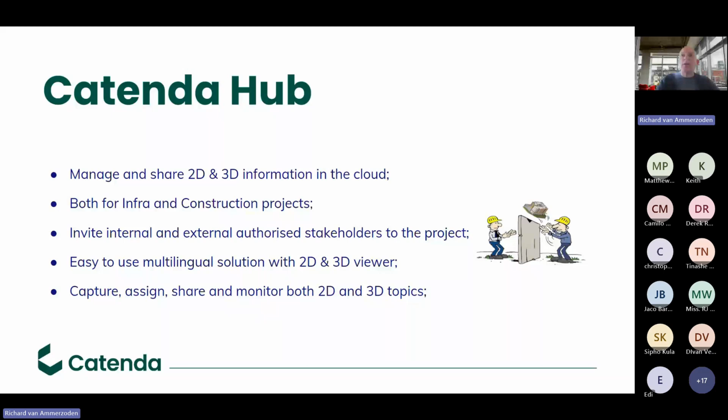And on those models and on the drawings, you can make comments. We call it topics—a change request or comment or whatever. And you can assign these topics to somebody who needs to solve this.

Catenda Hub has 4 pillars: models, but also point clouds. Imagine you need to renovate an existing building—you can make a point cloud of the building, and combine in the 3D viewer the point cloud in combination with the IFC file. We have documents and we have topics, and all these 4 pillars work together. So you can make, for example, a topic on a point cloud, or connect a document to a topic, or a topic to a model, you know?

Let's look at the BIM part of Catenda Hub. It's a powerful, but very user-friendly, 3D viewer based on IFC. In that viewer you have functions like intersecting, measuring, hiding objects, etc., and I will show it in a couple of minutes. But also your object data is available, so you can exactly see what's the material of the object, or what's the quantity of that object, etc.

Revision management—you delete nothing in Catenda Hub, but each model, each drawing will get a new revision. You will always automatically open the latest revision, but with some extra mouse clicks, you can open an older version of a document or a model. For the rest, strong topic management based on BCF, an open standard, and you can connect 2D information to the 3D object—for example, a reinforcement drawing connected to a 3D beam.

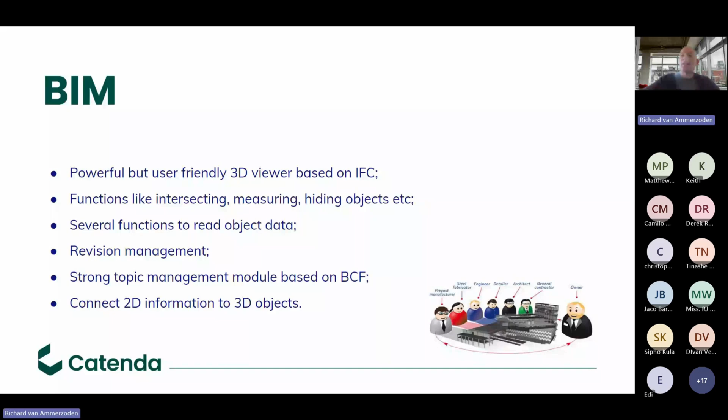Document management: authorized folder structure, so you decide who can access a folder, yes or no. There is a 2D online viewer in Catenda Hub, and it supports most of the engineering formats: standard AutoCAD, standard MicroStation, PDF, Office, DXF, etc.

There is redline functionality to make comments, and these comments can be connected to a topic, so you can assign a topic to somebody who needs to change it in AutoCAD. And of course you have extensive search and filter functions for documents. A logbook records all operations—who's uploaded the drawing, who approved the drawing, etc. And we also support the new ISO 19650 for drawings, which means you also have a workflow to approve files.

Topic management, now what I explained, it's both for 2D and 3D. If you're using Navisworks, or for example Solibri, you can synchronize the clashes automatically with Catenda Hub. But if you have a BCF file with issues, you can also import it. And you can create topics in point clouds, in models and documents. What's very important is also that you can authorize topics.

You can also give a logical name to a model, so for example architectural or construction, so that everybody sees what kind of model it is. And very easy, with one button I can now open all the aspect models of all several disciplines. It's quite a big apartment building in the south of the Netherlands. You also don't need a very strong internet connection. Sometimes I use the internet of my mobile phone to present it. It's still working smoothly also when you don't have a strong internet connection.

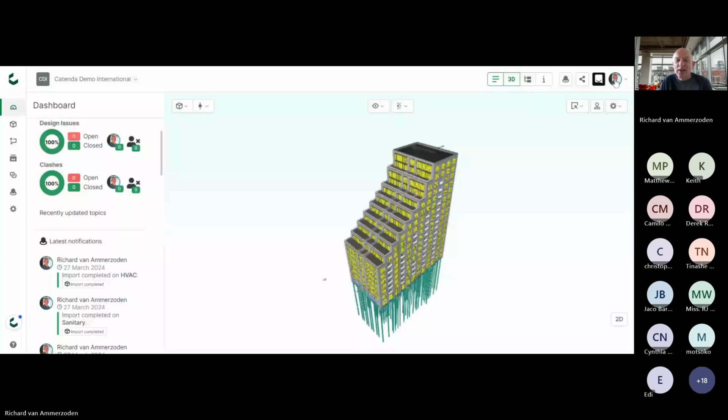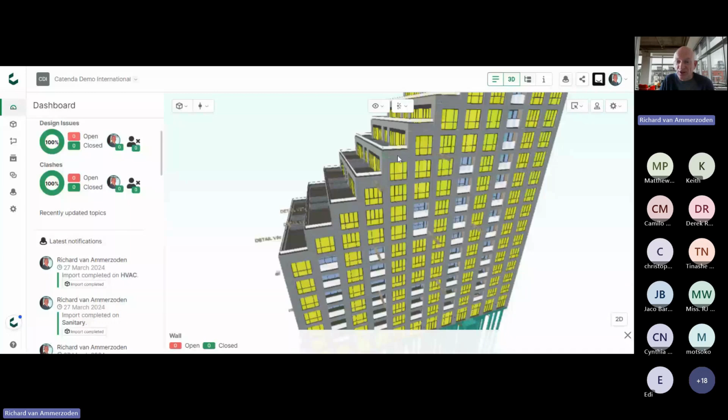Okay, here you see all the 9 models. And now you can't see it, but with the wheel of my mouse, I can zoom in, I can zoom out. I push now the left button on my mouse, and now I can turn around on the model. Very interesting is that on the right mouse button, there are a lot of functions. Here you see a lot of functions, and I can, for example, create a clipping plane.

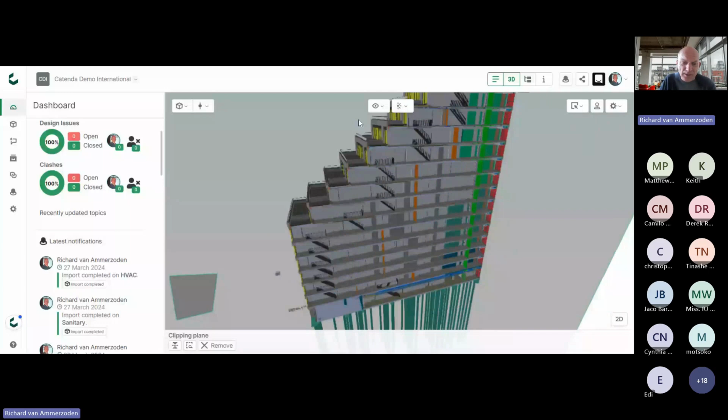And here you see, now I put my left mouse button. You see, I have a clipping plane. What I can do, here on the left side, you see the clipping plane. There is a green line around it. If I click on the green line, you see the model will freeze. And now with the mouse, you see?

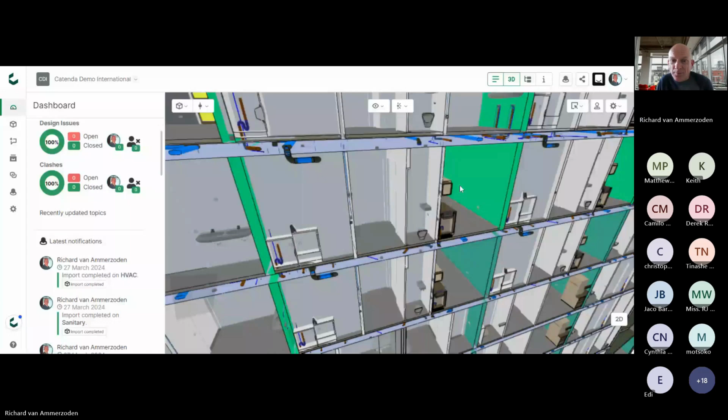I can zoom in, or I can say, for example, what's behind that wall? I say hide. So without being a BIM expert, you can very easily zoom in, zoom out, make an intersection, hide an object, etc. This model has been done in Archicad.

For example, when I click on this wall, I go to information. Here you see the Archicad quantities - the length, the area of the doors. Or I like to see, is there some material? Yes, there is also some material attached to the wall. So all the properties which you used during modeling in Archicad is still available in Catenda Hub.

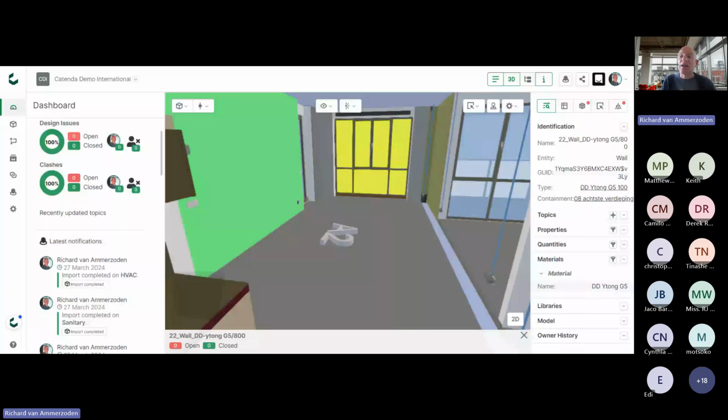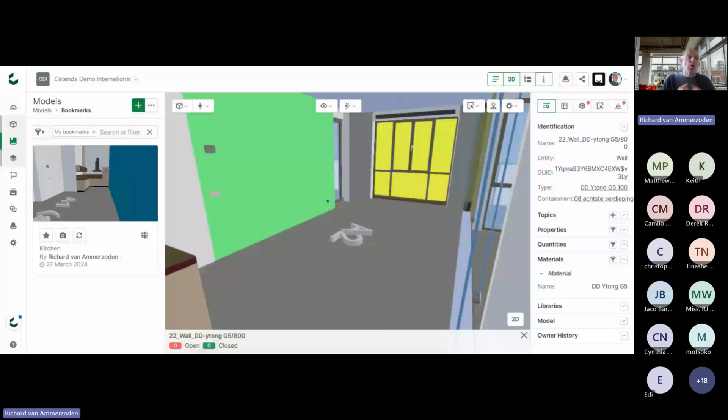What you also can do, you can also store some views of a model and use it in a later phase. We call this bookmarks. So you can create a couple of bookmarks. You can keep it for your own, or you can share it with the project. And when I click, for example, on this button, it will go automatically to this place in the building where the bookmark is.

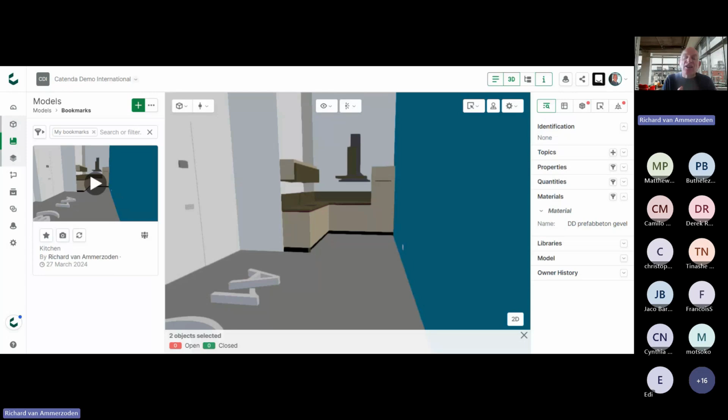This is a bit about viewing the model, getting the properties, bookmarks. The next thing I'd like to do is to create an issue, a topic. So I go to topic, and I will make a new topic. I say, for example, a kitchen.

Catenda is working with issue boards, topic boards, and a topic board is a kind of folder where you can divide your topics. At a certain moment, you have thousands of topics in your project, and with the topics board, it's much easier to find the topics. You can give the topic board your own name. I had, for example, clashes and design issues, but you can make 10, 20, several issue boards.

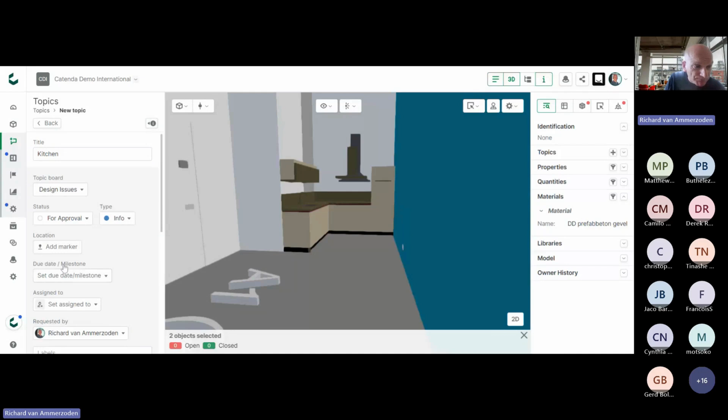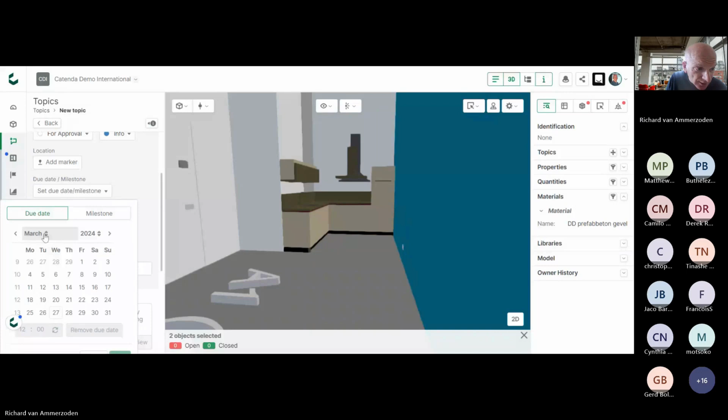You can give it a status, it's for approval. And I can say, okay, info. When does this topic need to be finished? Oh, I can say, okay, let's say the end of April.

And then you can assign the topic to somebody. You can say to the structural engineer or the person who will put the kitchen into the apartment, etc.

I can also put some extra metadata to an issue or topic so that you can find it easier back. So I said, for example, okay, this kitchen is on the 2nd floor. And then you can say, show me all the topics which are open and which are on the 2nd floor. And these labels, you can define completely by your own.

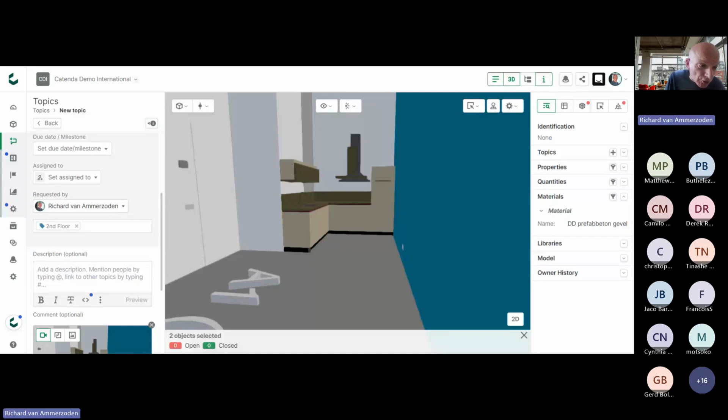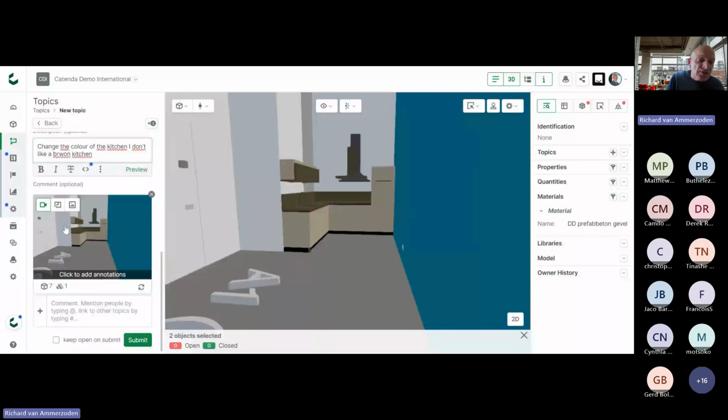And then I can say, change the color of the kitchen. I don't like a brown kitchen, whatever. Here you see it creates a snapshot of the model. And here I can redline, I can say, okay, this kitchen, and you put an arrow on it, and I say submit.

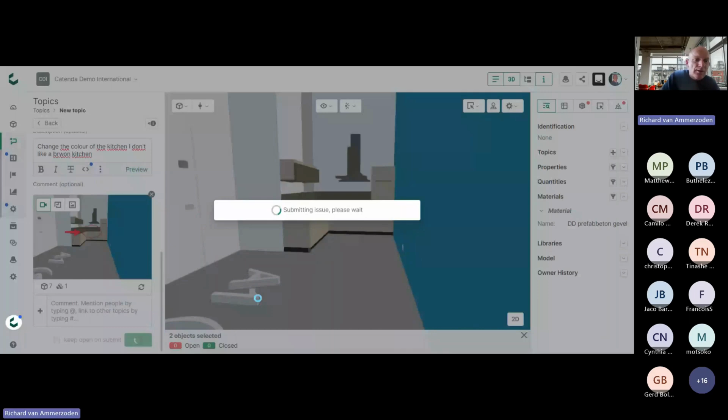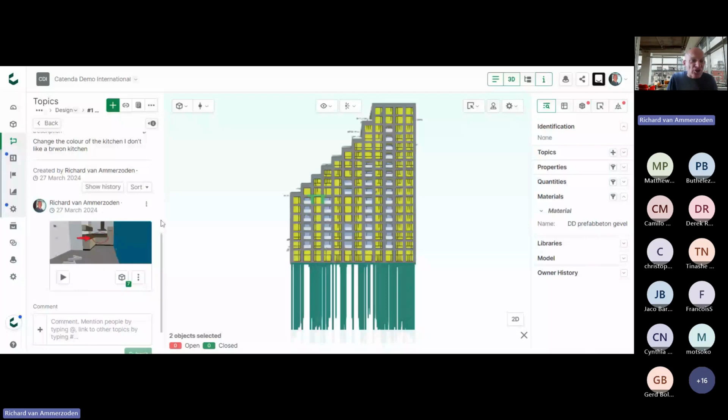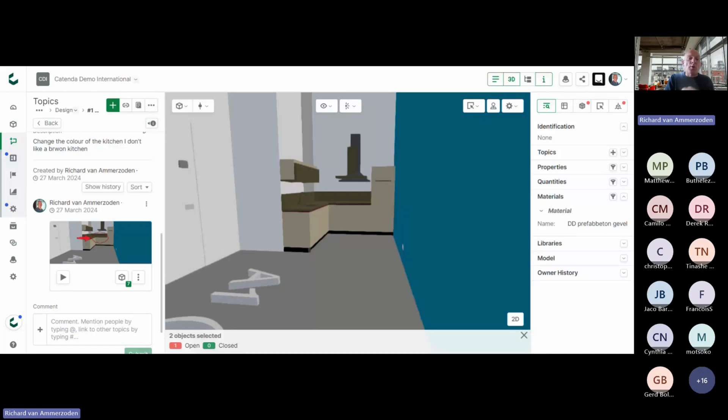Now this topic has been created. And now I need to solve this topic, and I think, okay, where in this huge building is this kitchen? Look, here is a button. I click on the button, and it knows exactly where in the model is the topic. And it doesn't matter if this topic has been created in Navisworks or Solibri or has been imported by BCF, Catenda Hub always knows the place of the topic in the 3D model.

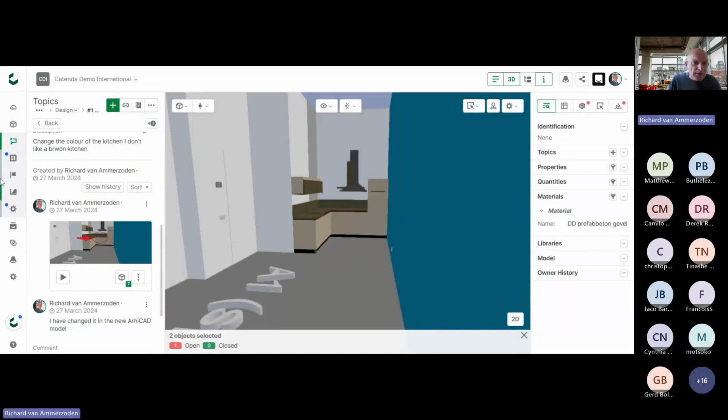And imagine I have changed the color of the kitchen in Archicad. Now I don't send an email, but I will make a comment in the topic, and I say I've changed it in the new Archicad model. Okay, you check, has it been solved? And you close the issue, the topic.

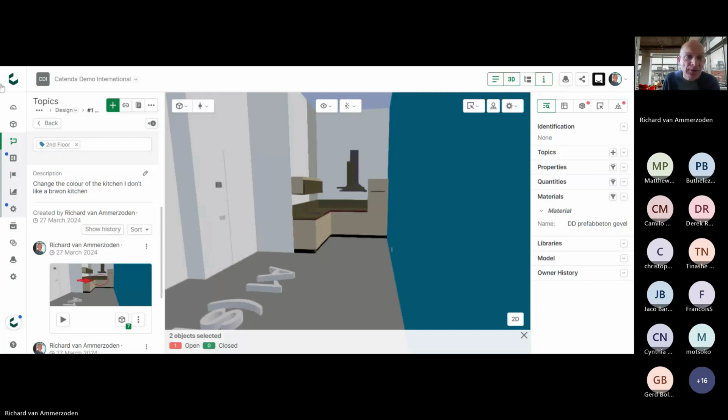So this was everything about BIM. Now I will switch over to documents. With this button I can switch off the 3D viewer, I can switch off the information, and I will go to documents.

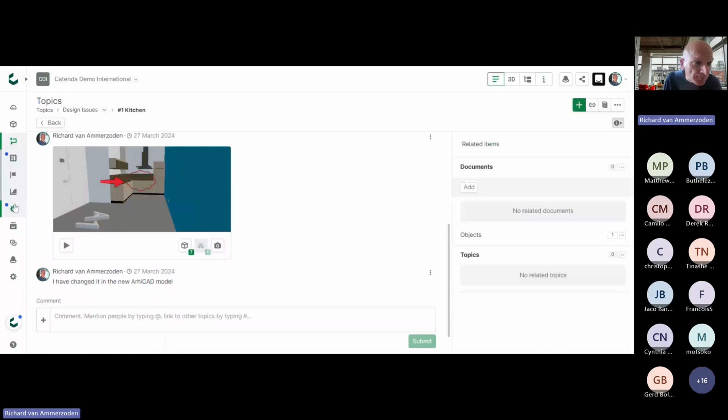I've created my own folder structure. If you have your own folder structure in your company, you can make a zip file of your folder structure. You can say upload zip, and then it will create automatically the same folder structure as in your zip file. Some folders have a color, that means there are files in that folder, and some of the folders are white, that means they are empty.

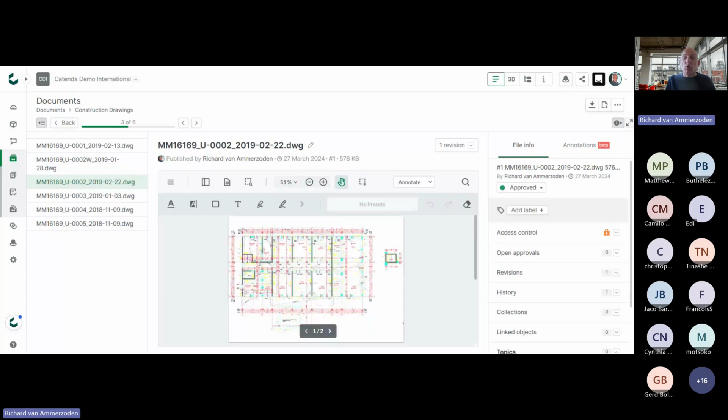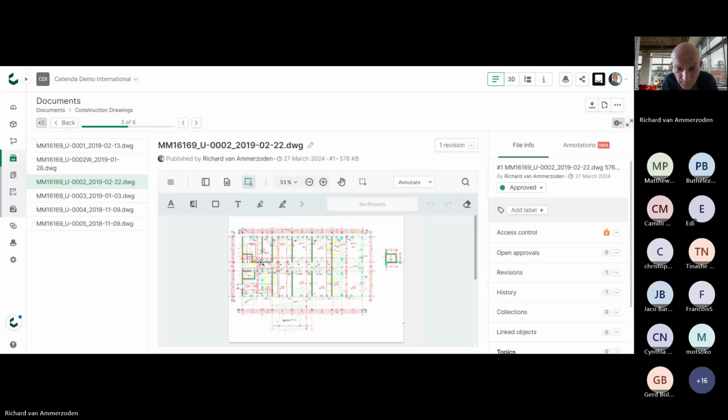For example, construction drawings. Here you see a couple of AutoCAD drawings, construction drawings, and I can click on it. And without having installed an AutoCAD viewer or whatever, it shows online the AutoCAD file. What you can do, you can zoom in, of course, and you can pan and everything used in a viewer.

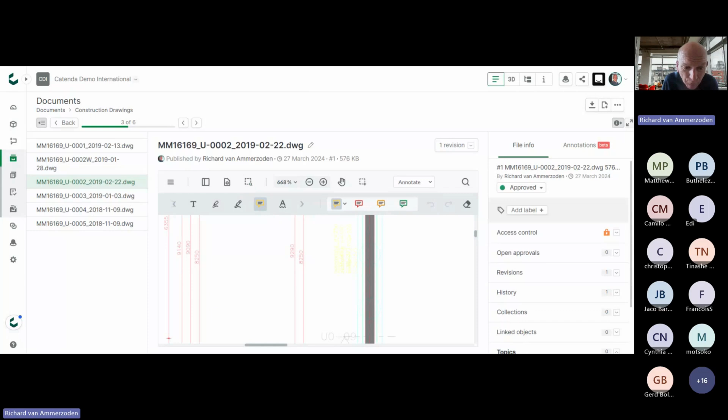But I can also annotate. Here you see annotate, and I can make a remark. And I can say, for example, please change it in...

You can make a lot of changes on the drawing. At a certain moment, you're ready with all the remarks and comments on the drawing, and then the next thing is you create a topic.

Here you see the same user interface as with a 3D topic. I set it open, I set the error, I can assign it to somebody, I say it needs to be done before Friday, I make a comment. Let's submit.

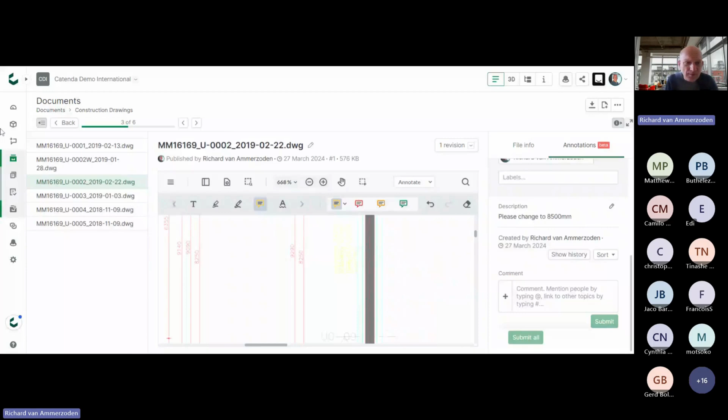And if I go back to my dashboard, you see here is the topic measurement. And if I click on the topic measurement, it's exactly like with 3D. It knows exactly in which drawing the topic is.

Here you see the topic. You change it in AutoCAD, you close the issue, and so you can do your topic management completely for 2D drawings and models, and it works all together.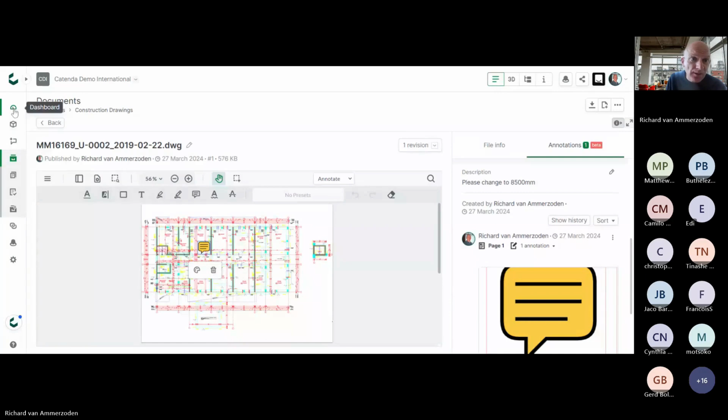Of course, I can show you much more about Catenda Hub, but I will leave it here so you have a bit of a feeling what is the added value of using a common data environment in your project instead of using email and WeTransfer.

So it might be interesting for the people familiar with Archicad to see how it plugs in and what it actually means. Sometimes you've got to see it to then sort of comprehend how this interoperability works.

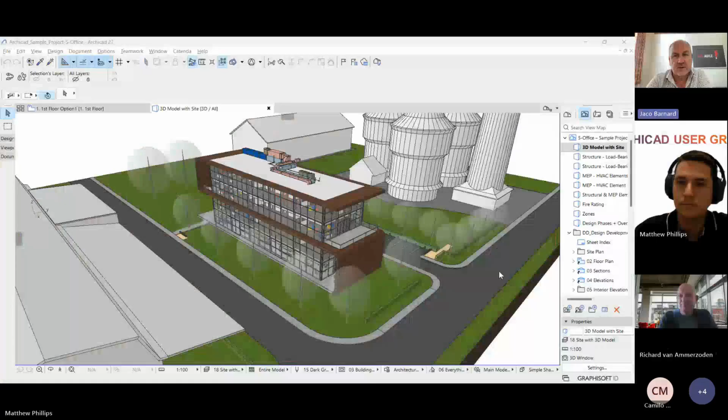Richard shared the plugin link. I just unzipped, extracted, and installed it, so you can see it up at the top here. I then just took this as a sample project that I found publicly available on the internet.

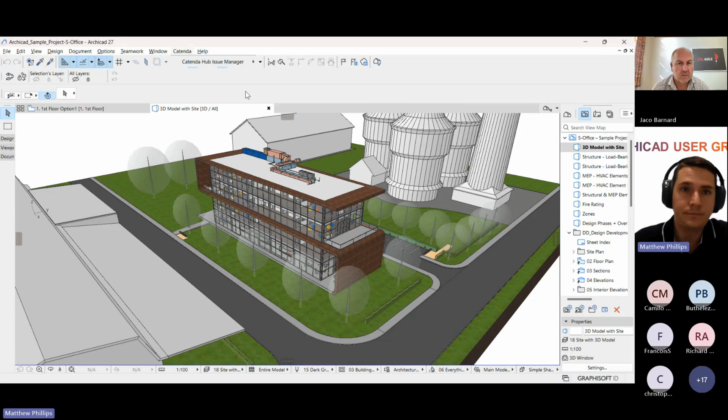So I just shared an IFC model of this 3D view onto Catenda Hub. When I come over here, I can go to the Hub Manager. This is what the manager looks like.

I can see here that there is a chair topic, and when I click on it, it expands and tells me that there's a chair that's been missing. You can see it over here. It's quite a large project, so I'm not too sure exactly where that is.

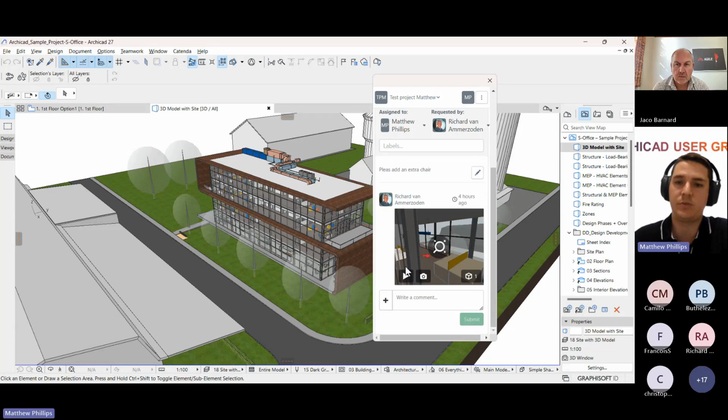So exactly as Richard explains, if I click on the plus, it will take me directly to that place, which I thought was really cool.

That's pretty much everything that I had tested. I didn't play around much with it, but it was really simple to install and get up and going. I just had to create a username and password, install the plugin, and off I went.

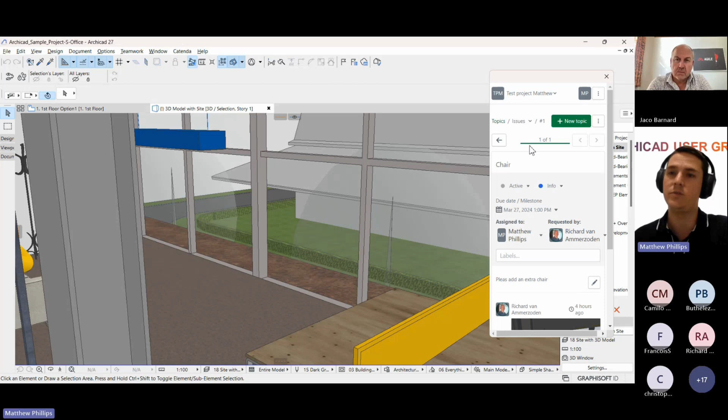It's also nice to see that this could potentially integrate with your revision management on your layouts, because it's linking up with the topics. So you can see at the top here, even though they're called topics in Archicad, it's linking them to the issues. That's the long and short of it.